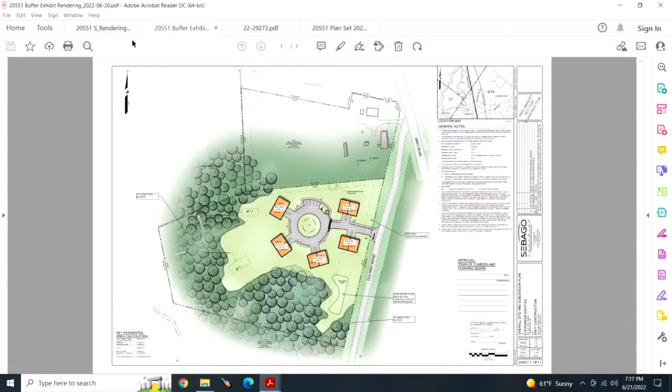Just a couple things. Could you define partial regarding the buffer? Do you have a foot? Yeah, so this plan shows it, so really along this portion of Old Gray Road and along that lot line from the lot conveyance, that would be the reduced buffer. To what though, is what I'm asking? To what measurement, roughly? There was a slide that you had that showed the two differences somewhere. I'll try to pull that up. I'm just interested in knowing, if we're going to approve a waiver, what exactly are we approving?

Pretty good size. So along Old Gray Road, I don't have a measurement on this, but what's highlighted are the setbacks that were defined within that zone. So we can treat the typical building setback as the vegetated buffer and add more robust plantings for visual screening at these two locations that are highlighted in yellow here.

The plan that I had pulled up here is the grading plan, and it shows how much excavation will occur in this area. So there's more than a 10-foot grade change here, as well as some mounding and grade change in this location here. So this mound could be planted with much more landscaping, and the top of this excavation could be planted as well.

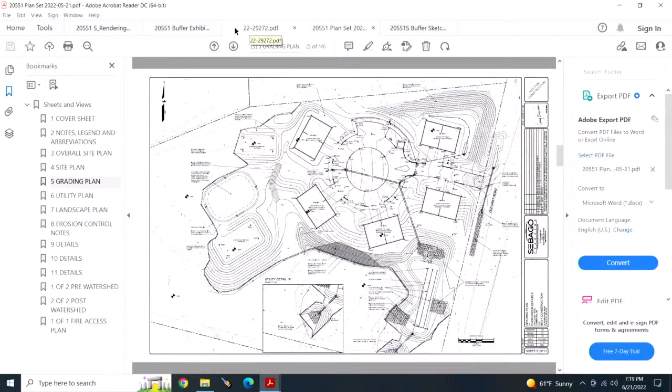I couldn't tell from the drawing, but you're asking for a waiver of the 75 feet. So not only how long is this change that you're asking for, but roughly are you asking for 30 feet? I just couldn't tell from the materials I had. Maybe you don't know. Yeah, so I believe this front setback is 25 feet, and the side is 10 or 15, if Carla could confirm. Okay, all right.

Page 14 of the packet, I think, kind of has that. The green area is the 75-foot buffer that is going to be maintained. And when you compare that to where everything is situated, the condominiums, you can kind of get a feel for what we're looking at in terms of a reduction in the buffer on those. My page 14 doesn't have that. Yep. And kind of in line with this, even though this is a preliminary, don't we normally have the engineer's comments?

We did. They were not put into this. I thought they were cut and paste in here. Well, I read through the whole thing. Did everybody see them? Like regarding the stormwater, you said everything was okay with the engineers. It is, and you're right. I just don't remember why it didn't cut and paste in here, but he was fine. He actually had very few comments. They were addressed by Craig. And would they be included in the final? Absolutely. You'll have the final.

If you'd like, I can skim through them. I have them right here. How many are there? There's 4 comments. Okay, yes, could you please? Yes, the first one is just to provide an estimate of the total project cost with a financial capacity letter. The second would be to include all the different sections of the stormwater management report. I believe we accidentally did not include some of the sections, so we'll include all those sections with the final application.

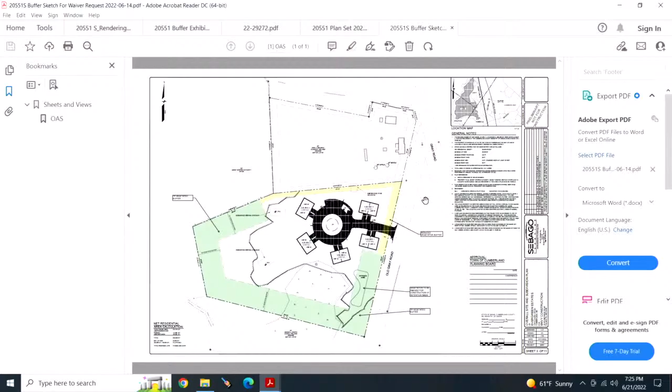Carla, I know it gets a little sticky sometimes. So the buffer that's required and is in the deed in the land to the north, we have no purview over that, right? So if they opted not to do that, we have no authority to enforce that, and the person to the north would have to come after them for that. Right.

Yeah, it's an interesting way to do it. I was surprised when I was reading through the deed to find that. But I can see why that property owner would do it that way, because he has control over it, rather than delegating it to the town's review process to put the plants in. Planning board could be redundant and still require plantings on our side, this side of the property line, but

Would it be outside of our purview to make it a condition of approval to honor that deeded plantings on the next piece up? I don't know how you would do that because it's not going to be shown on the subdivision plan. Gotcha. Okay, it will be part of the plan set, so we did submit a landscape plan. So this shows some trees along Old Gray Road now, but did not include that row up here.

So with the next iteration as part of the final application, we will include a buffer, a planted landscape buffer along this property line, as well as supplementing this buffer with more shrubs and more plantings for that visual screening. And is that agreement with the previous landowner, those plantings, are they supposed to be on this property or theirs?

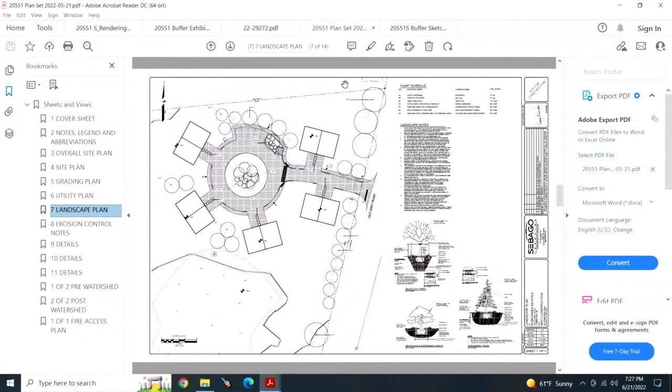That's a good question. It really wasn't, I don't believe, detailed in the deed, but we would put it on this parcel here. Unless, of course, I'll try to reach out to them to see if they would prefer it on their property. In that case, I would get some type of written statement from them saying that. Okay. All right, Bridget? Well, I believe that we could enforce the vegetation buffer within the width of the waiver that we approve, right?

So, and then I just pulled this up here. It is 25 feet from the front and 15 feet from the side. So I would feel comfortable with a motion that included those set values and then enforcing the vegetation buffer within 15 feet and 25 feet. Okay, makes sense to me. Question, would that be a standard condition of approval or part of the waiver? What was just said, yes. I think it could be either way.

I will tell you that I'm looking at the deed language, and I think it does clarify or state, Craig, that it's going to be on the seller's property. It says, shall plant trees of a consistent variety along the division line between the premises and the remaining land of the sellers as needed to provide a dense tree buffer. Distance and spacing to be determined by the type of trees planting. Oh, I misread that. I was thinking it was going to be on the remaining land. So it's between the two, and you're right, we need to clarify that.

If the board would prefer it be on this project's side, I think that can be accomplished within the setback. But as a standard condition of approval, as far as the vegetation, would seem to me to make more sense than making this waiver request something that a Philadelphia lawyer would have to understand. I'm sorry, ask me again what you mean by this. As far as this vegetation thing. The buffer. It would seem to make more sense to have it in as a standard condition of approval than loading up this waiver thing with tons of language.

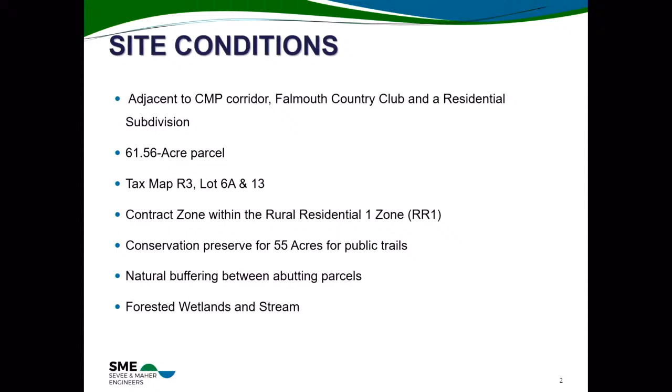There was a 43-space parking lot adjacent to the structure. The town requirements for a restaurant like this are 1 parking space per 3 seats, I believe, with a little bit extra for staff. We're also including 16 parking spaces not adjacent to the building, but along the access road on the way in.

There'll be 8 new parking spaces at each trailhead that we're going to be putting in for the trail network. And again, based on the ITE manual, which is the traffic engineering manual, and the anticipated use, worst case scenario, we think that 8 spaces at each should accommodate the users in town here.

The project will be served by a private well, which is already drilled and has been tested. Water quality is good, and the flow is good, so we're in good shape there. In addition to that, similar to the project before us, we're going to have a combination of 2 septic systems to serve this. Each will be under 2,000 gallons per day.

And the details of the routing on that are going to be tied to the architect and the actual building design and kitchen and wastewater versus bathrooms and that sort of thing. But those will be figured out and routed. Also, by splitting that up into 2 smaller systems as opposed to 1 larger one, the overall impact is distributed a little bit more, spread out, so there's less impact on the groundwater.

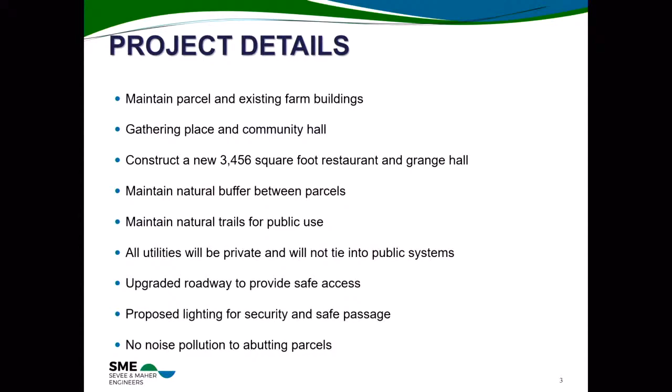The plan for the farmhouse is that, in hopes, the farmer that's going to work this land will be using that, either as his base, as his office, as his residence. That hasn't been decided yet. It'll depend on whoever comes in to do that work, but that's the hope.

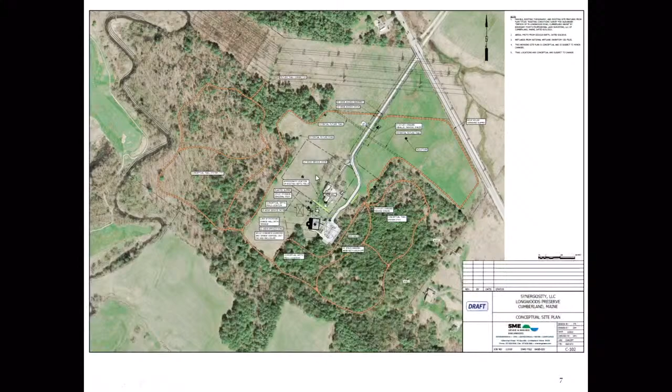Any questions? What specifically were you looking for from us tonight? Were there specific areas? Well, there were a couple of areas, and honestly, one of the things that got me thinking about it was the previous presentation, the landscaping and the buffering and that sort of thing. We're not anticipating a formal landscape plan with this project.

Right. Okay. So one of the questions I would have: the only landscaping that we would be providing with this project would be some of the screening by the farmhouse. It'd be internal. Do you see the need for a formal landscape plan and a landscape architect for this sort of thing? I don't.

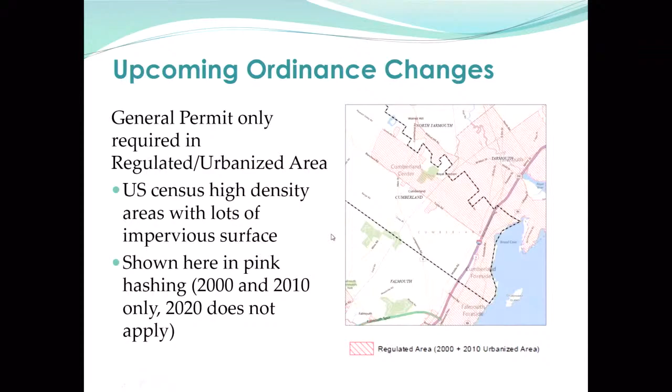So your regulated area might be a little difficult to see. It's shown in pink. Let's see if my mouse works here tonight. Yes. So the pink area, basically everything to the north, the Yarmouth side of Tuttle Road and Blanchard Road. The 2020 census does not yet apply, but it will on the next permit cycle.

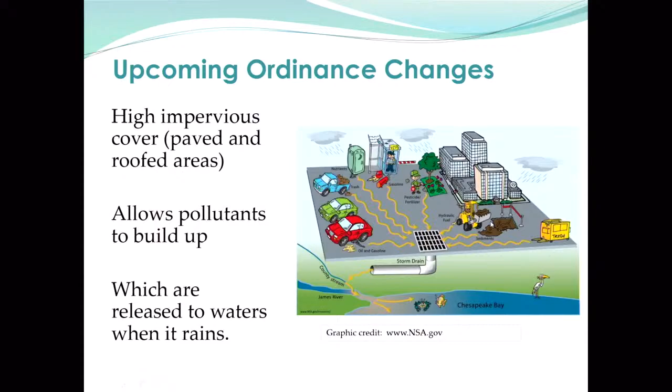So I like this graphic. It shows these developed areas and a lot of different kinds of pollutants. Oil and grease from cars, the brake dust. People don't even think about all the brake dust that goes down. Gasoline, pesticides, fertilizers. The stormwater permit addresses all of these, but in particular, construction sites and post-construction sites. All of these pollutants build up and get released to the water bodies when it rains.

So the permit affects almost every aspect of municipal operations. Public Works takes care of most of the program, and they coordinate with Cumberland County to do some public education. That's going to be around pet waste this year, and public participation. They'll have some cleanups going on.

Public Works takes care of mapping the storm drain system and doing inspections on it, but I'm here for Planning Board tonight because we're going to talk about the construction runoff control that's part of this permit and the post-construction runoff control. So erosion sediment control for construction sites, low impact development after construction. And then Public Works also takes care of pollution prevention, good housekeeping: all the street sweeping, catch basin cleaning, those kinds of things.

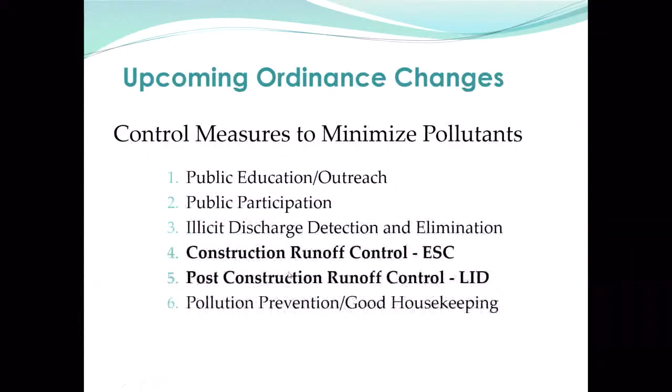And again, this is the one that we have 2 years to get through. But we do have this interim milestone, September 1, 2022, that we're going to have to address. The way the permit language is written, it says we have to submit a model LID ordinance to the DEP by September 1, 2022. But actually, the Portland area communities have been working on this model ordinance for about a year now because we've known for a while it had to happen.

So I have a draft for you, and that's what I'll present tonight, what the Portland area communities are proposing for some of these low impact development strategies. So after we do this interim submittal, September 1, the DEP will post it for public comment, and then they'll get back to us by November 1 of this year as to which of those strategies we have to implement in the Cumberland ordinances. So I have a list already that we'll go through, and Carla and I'll present that to you guys well before, probably July, hopefully.

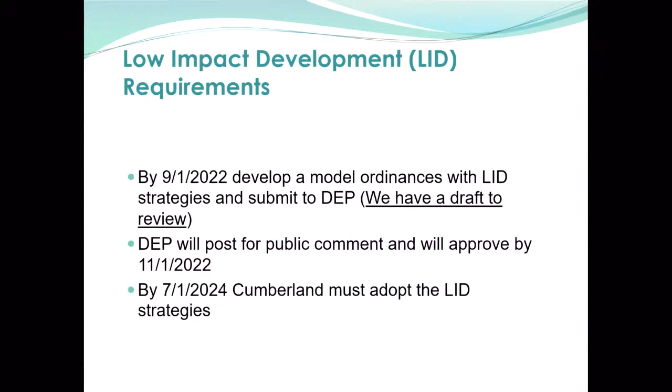And then after November 1, when you know what your specific list looks like, we'll have until 2024 to get that implemented. So what the current list looks like right now, well, we've been working on this model ordinance for about a year now. We received grant funding last year for it under the Maine Coastal Program. We've been working on it. There's been a technical expert panel, people from UNH Stormwater Center, and planners from around the state and Southern Maine Planning and Development Commission. And we just finished it up this week. It's going into legal review by Jim Katsafikis, just the listing of the standards.

And so the listing, you guys, do you need me to review the definition of low-impact development? Okay. Is that a no? Okay, Carla knows, okay.

So the listing, this is basically what it looks like. The way that our permit was written, we have a number of low-impact development measures that we have to address, and we have to embed some performance standards directly into the ordinances that will address each of these concepts or measures. So the first one is minimize site clearing, right? You don't want to just put grass everywhere, you don't want to clear everything. So we have some submittals that will try to protect sensitive areas. Actually, we modeled a lot of it after your conservation subdivisions, so that should be fairly nominal editorial for you guys on the low-impact development. So protect a lot of the sensitive areas, just like you're doing with conservation subdivisions.

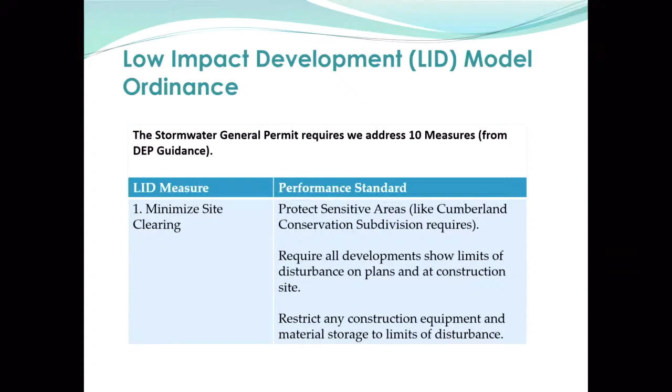Require that all developments show the limits of disturbance on the plans and then on-site during construction. And then restrict all storage movement to those limits of disturbance. I'm not sure those are specifically embedded in your ordinance right now, but they really help a lot when you're getting out there for enforcement. And some of these seem a little funny, but all the folks on the committee and the technical experts were like, these are things that could really help to improve water quality and protect natural areas.

One that's a little bit heavier lift for everyone, and it will be for the developers also, is to protect the natural drainage system by requiring the use of the Maine Stream Smart principles for crossings. This would apply to sites that disturb 1 or more acres of land. So I didn't see a development tonight in the 2 developments that I saw that were going to do a stream crossing, but both of those would have triggered this.

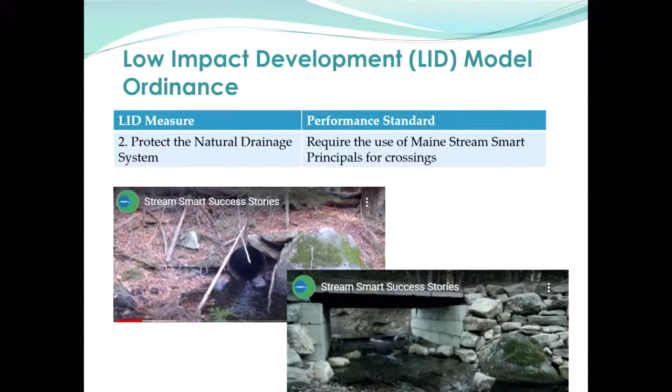And so the inverted culverts that are embedded with the naturalized bottoms to promote fish passage and protect the benthic organisms of the streams, instead of the kind of hanging culvert that has been a classic design in the past. So it will be a little more costly for developments, and it's something that we will have to carefully consider before we decide that that's something that the town of Cumberland would like to adopt for its sites.

A couple of the other measures, I'm not sure I need to go through all of these. I think what will happen is we'll probably have a staff meeting to discuss these and put a proposal together for you, and probably come back to planning board in another month or so to discuss all the details, just in the interest of time. But there is a new infiltration requirement. There'll be some changes to parking space standards and minimum parking standards, if you believe that those would benefit water quality in the community, and you decide to adopt them, and they're consistent with the rest of your ordinances.

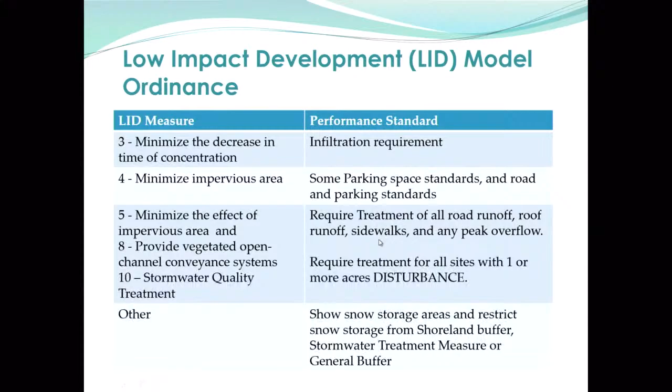And then I think a couple of the biggest ones are that you would be requiring treatment of any road runoff, sidewalks, peak overflow parking, and basically impervious areas and developed areas for any site that disturbs 1 or more acres of land.

So as I listened to the 2 proposals tonight, the first one, the 10-unit subdivision, they were only going to create 0.7 acres of impervious cover, so they don't need a DEP permit, and they're putting a detention pond on, which doesn't have any water quality treatment associated with it. It's just a volume control device.

So that site would now have to also provide water quality treatment in the form of rain gardens or a biofilter, under drain soil filter. So it would be a little more significant and definitely more protective of the small stream that was to the north of the property, so.

And the infiltration standard, also up here in item 3, is important because many of our streams, as these developments get constructed, the general groundwater infiltration and the base flow to the small feeder streams tends to dissipate a lot with the impervious cover, and then you get the big flash flooding going in. So infiltrating will be important, as well as providing treatment to make sure that the water's clean when it gets to the groundwater. So a couple of snow storage things.

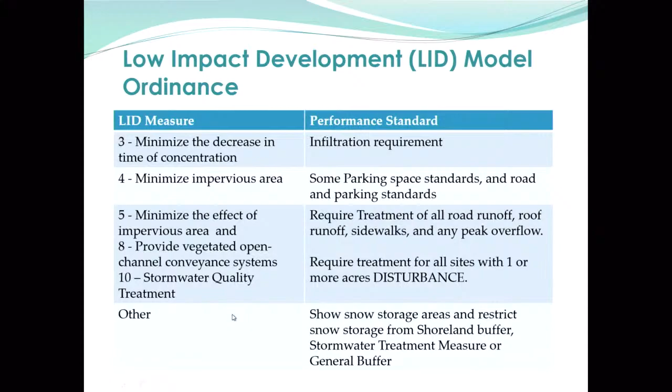So, and then a few more here. And again, I won't go through all the details of them, but it's a pretty dense document. We have a couple of documents that we'll have you read. One's the rationale document for the things that we agreed upon in the committee. That's kind of basically, you'll have a checklist of items.

We do have to address each of the 10 measures that are listed on the left with some form of performance standard, but we can make some changes to it. And basically, we need to provide some concepts to the DEP by September 1. So not a lot of detail, but.

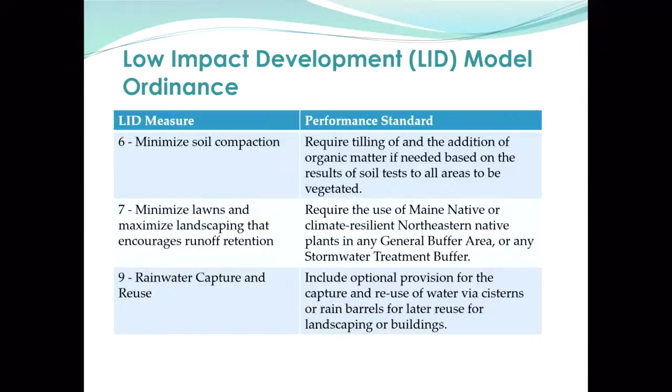Christie, I have a general question. Are the changes that are going to be asked of the town anything that the planning board has any discretion over? I mean, are we just going to be providing what we need to do, and the planning board will make a motion to adopt these ordinance changes?

So for this piece, you will have some discretion. Some of the discretion will come in the form of, does it conflict with standards that you currently have? Or is it not appropriate for a specific zoning area? Like, you already have your conservation subdivision, which only applies to a couple of zones. And I think you have very good reason for why you decided to promote conservation subdivisions in those zones. And that is probably the zoning area where you will want to adopt most of these.

So you'll have not only the content and which specific standards and how those standards are going to be embedded, but which zones they would apply to. Okay, does that make sense? Yeah, I'm just wondering. It's a lot. There's a lot of detail here, a lot of technical requirements that typically planning boards don't get involved in. That's what staff does. Yes. So I'm just wondering, I'm sure they're all wondering what's going to be asked of us with this, okay? Yes. So that's my next slide.

So this was very quick, because this is the piece I just kind of added in at the end, because I knew we were wrapping things up, and I wanted to at least have the planning board understand that there are going to be discussions going on in the background for staff around this, like you and I and Bill Shane and Bill Longley will be reviewing all those performance standards in detail, and I'm imagining that we will provide a recommendation letter to the planning board with an additional presentation about what we think you ought to do and why. Yeah, so that'll happen.

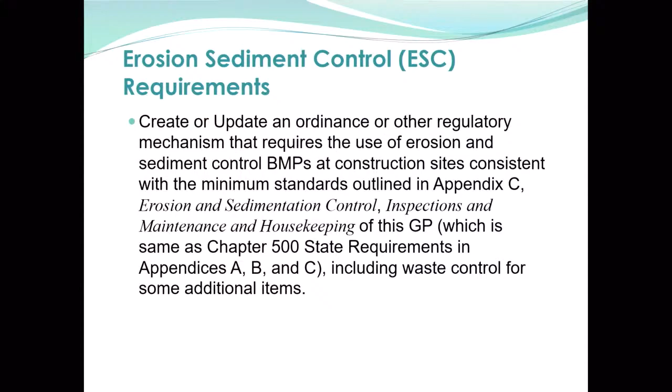So the difference is, they're already doing this, it's great, but the Maine DEP does not have enforcement authority to do a stop work order. So this requirement has now come down to the municipalities, that all of these specifics are gonna be embedded in the town ordinance so that the code officer has better enforcement capability and better ability to do a stop work order. That is really the intent of this.

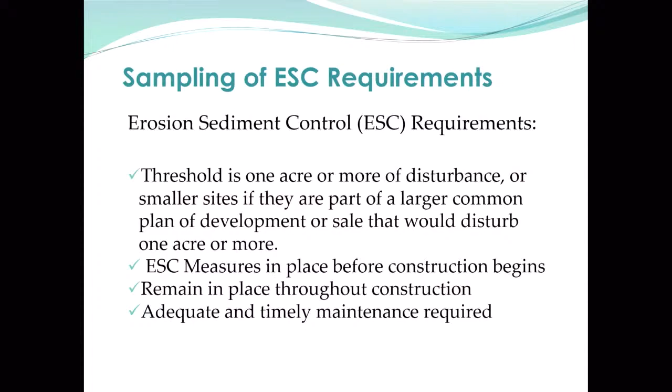There are so many of these standards that I can't go through all of them for you tonight. But generally, it's the 1 acre threshold, which is the same as the state standard. The measures have to be in place before construction begins, remain in place throughout construction, and then there has to be adequate and timely maintenance. And I think the adequate and timely maintenance is one of the things that the Maine DEP has been having issues with.

One of the ways the erosion sediment control standards handle this at the state level, which will now be at the town level, is that the contractor themselves has to be inspecting their BMPs, their silt fence, their bark mulch berms weekly, before a rain event, after a rain event, and then they have to keep a log. And most of them are not keeping logs, and most are not doing these inspections. It's hit or miss if somebody shows up at the site and realizes the BMPs have not been maintained. So this will get locked down a little more tightly now.

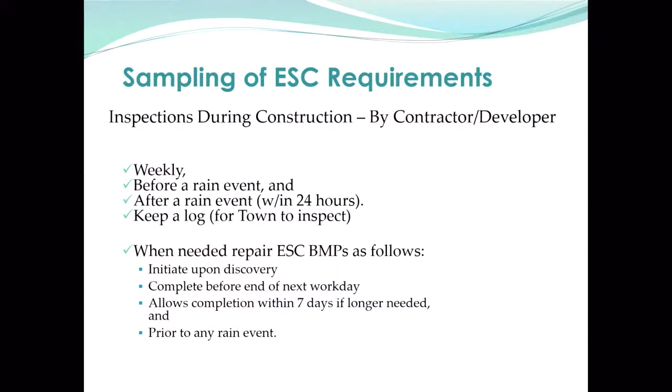And then when these erosion and sediment control BMPs need to be repaired, it's the fine print. The contractor has to initiate upon discovery, complete before the end of the next workday, allow completion within 7 days. You can work with them if you need to give them a little bit longer, and it has to be done prior to any rain event. So those are all gonna be a little more strictly enforced, I think, than they have been in the past.

The municipality does have a few more inspections that Bill Longley or third-party inspectors are gonna have to do, so those will be up to 4 or 5 inspections per site. I think you guys are already doing more than that, but many communities were not. And then there's also a requirement for a pre-construction meeting, which Cumberland already requires, which is great.

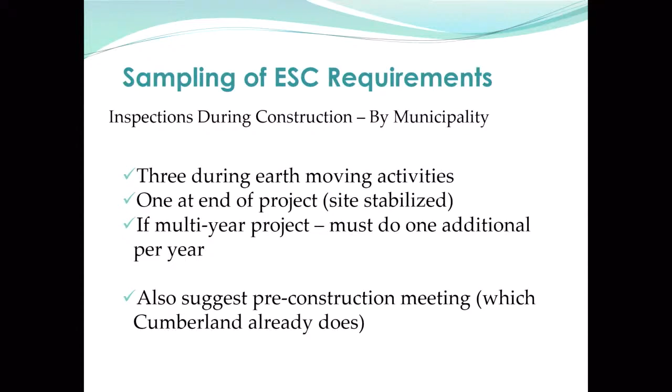So this crushed stone is designed that as trucks are bringing material in or leaving, they're going to be leaving the sediment in the crushed stone before they get out into the road, where then Public Works might have to do the street sweeping or clean up the catch basins. So it's a good BMP. The doormat for the trucks. Yeah, it's the doormat. I have not heard that before, but yes, that's exactly what it is.

But it has a specific design to it too, which, it's tipped. And then there's another row of either stone or bark mulch berm that will contain the sediment that might run off from the construction entrance. So these are pretty prescribed. This is how the standard details always look on the plans. But it doesn't always get inspected by the contractor, or by the municipality, or by the Maine DEP the way it needs to be. So a little tighter reins on all of this.

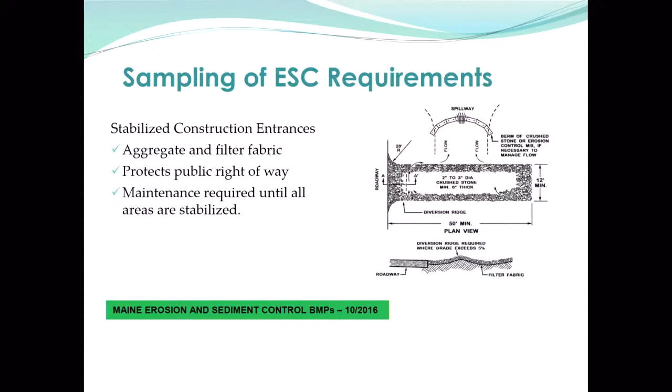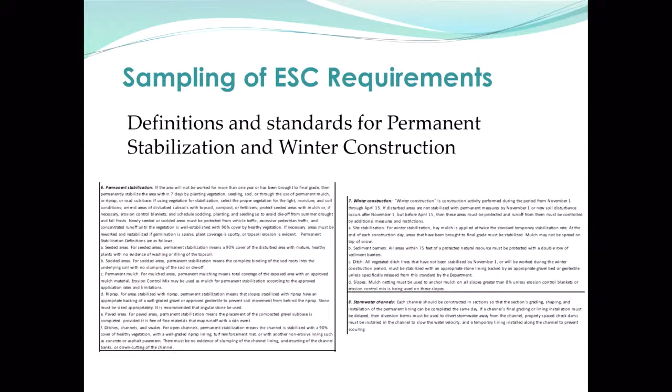And again, a very, very important BMP. There'll be a lot of new definitions and fine print that will make things much more specific for everyone. What is permanent stabilization? What has to happen during winter construction when here in Maine, we get rain events on frozen ground, which is partially thawed. So extra BMPs during winter construction. So all that detail will be either embedded or directly referenced by the town's ordinances.

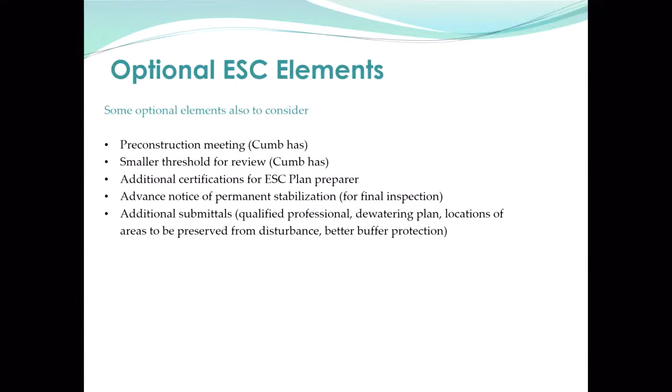And then this project also had recommendations for some optional elements, which we'll go through with the town staff and provide recommendations to the board as to what we ought to embed in the Cumberland ordinances. And then the specific standards that we're going to be looking at, I just wanted to give you a couple quick examples. This community already has the 1 acre threshold embedded for any kind of minor staff review. So that's already on your books. So we don't have to make any changes in that regard.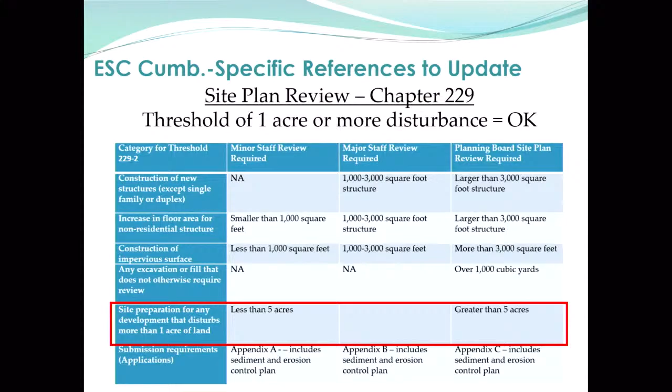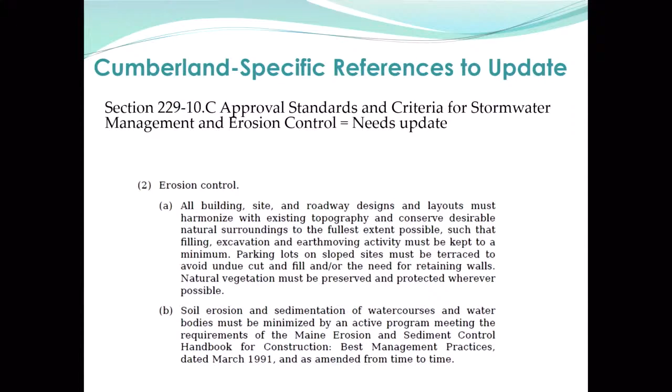But I took a look at both the site plan review performance standards as well as the subdivision performance standards, and this is the text from the site plan review. So section 229-10.C, this would be the section that we'll have to update with staff. We'll provide you back with the red line on this. But right now, the standard has some good language, but it's kind of vague. It's nowhere near as specific as the slides I showed you before. So this is text that we will have to update in particular.

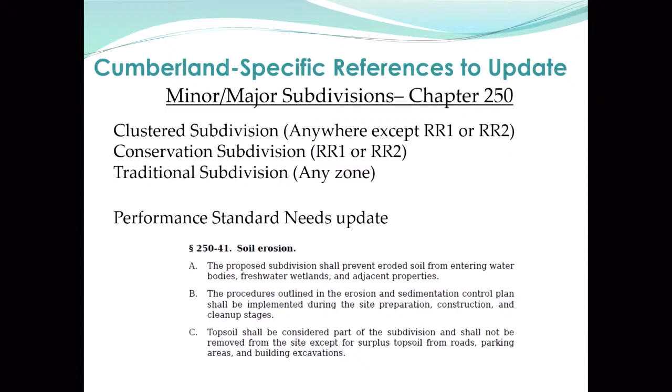And then you have a separate set of soil erosion standards for subdivisions, and that text is also not as specific as it needs to be. So a couple of different ways we could do this is we could change both of these paragraphs to just reference Chapter 500 standards. So that could be a nice, clean way to do it. We could also change both of those paragraphs to just reference an appendix, which has all of the standards listed out in it, which is another pretty clean way to do it. So I was thinking those two might be really good ways for you to do it.

We will, again, with staff, look at definitions, submittals, make sure everything gets cleaned up and do red lines on everything. But we do have this one option, if we want to just take those 2 paragraphs and reference Chapter 500 directly, we could do that. We have some good language that's already been approved by the city of Saco. So it was one option I wanted to present to you tonight.

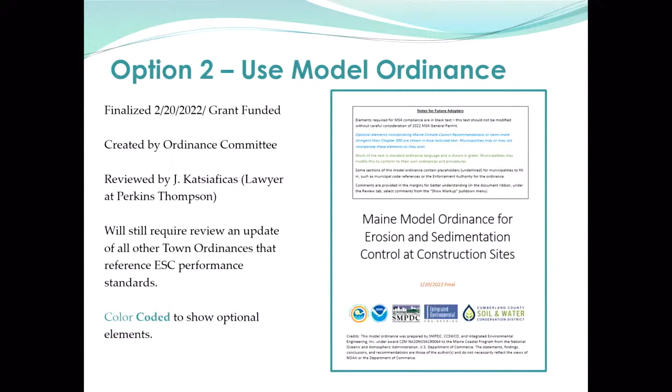And the other one is that we did write a model ordinance for erosion and sediment control. So if you wanted to have a whole other chapter for erosion and sediment control, we can do that, because there is a model ordinance you could point to and reference instead. But this ordinance, the way we designed this, is we gave it an appendix which actually has most of the standards in it that you need. So you could take those two little paragraphs and just point to the appendix.

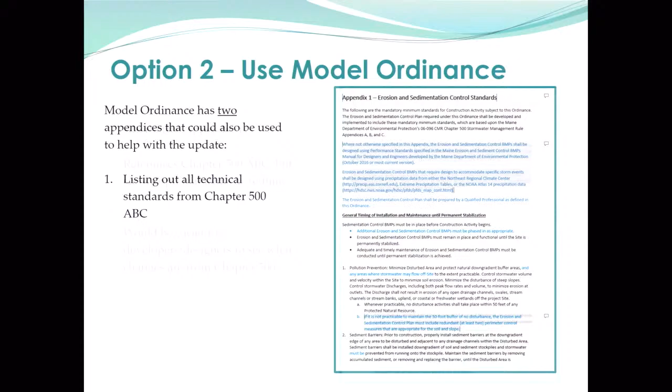So one way that we structured the appendix was with all of the detail on the erosion and sediment control standards. And another way that we structured the appendix, we have an alternative appendix that you could, again, point to Chapter 500, but if you want to adopt some optional elements that are a little more strict than Chapter 500, you could just call those out in this appendix. And that helps the developers to know what the differences are between your town standard and the Chapter 500 standards.

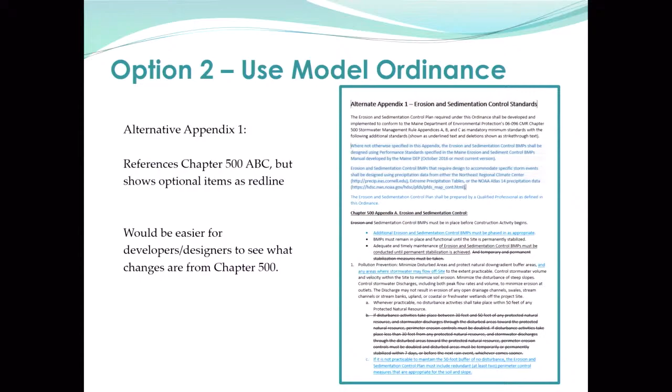So Carla, my question to you is that, as I say, this looked a heck of a lot more complicated than everybody thought. In your planning department's work plan for next year, we've not only got this, but we've got this huge mess that we're going to deal with the new zoning ordinances. Has there been additional funds? Because I assume we're going to have some outside help on some of this. If we budgeted any of this stuff, are we doing it in-house, or do we know anything yet on what we're going to do?

Well, as it relates to the stormwater changes, we already budget funds for Christie to work with the town. So that's done. She provides all of the technical expertise, informs Bill Shane and the various departments, Public Works mostly, myself and codes, on what needs to happen. And she'll do that with this, and we will present it to you. That's why I asked the question. I don't see each of you having a lot of specific input on these things. I think a lot of what you're describing, we already do. It sounds like we're just going to be tweaking it a little bit so that it's easier for Bill Longley to enforce. But we're not going to be reinventing the wheel.